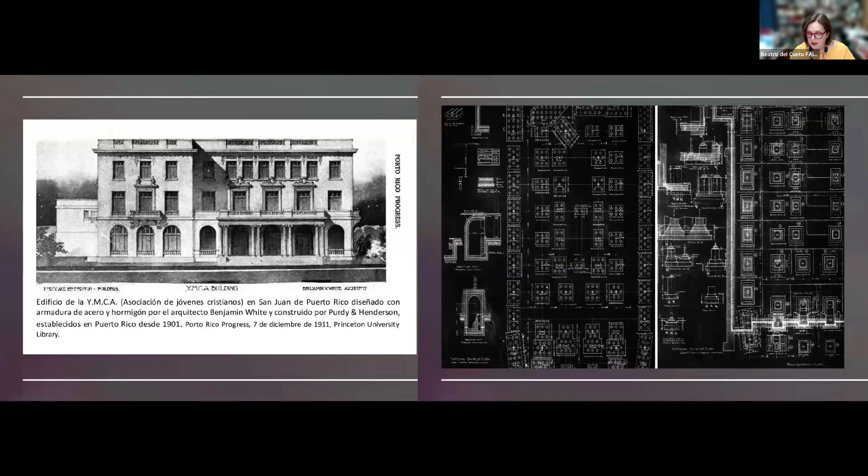This project was approached in a transdisciplinary format from its architectural, social, economic, and heritage history in order to cover all the aspects that affected design and construction. To achieve this, several sources were researched and included, such as national and local archives, national and private libraries, private depositories and collections, online sources, and personally photographing the buildings selected.

Building methodologies evolve. There are several common denominators in the Spanish Caribbean that affected design: our cultural baggage, that is, our historical roots, the island geography, the climate, the types of natural disasters, and the flora and fauna.

The trade routes for the importation of building materials, merchants, and artisans from the old and new worlds made the West Indies or the Caribbean into an important stopover that eventually promoted urban expansions, the manufacture of prefabricated materials, fast and innovative designs, and the use of light steel frames.

The hot and humid tropical climate facilitated the rapid setting of the new material known as plastic stone or cement. The use of standardized molds with a cement mortar allowed prefabrication and facilitated installation.

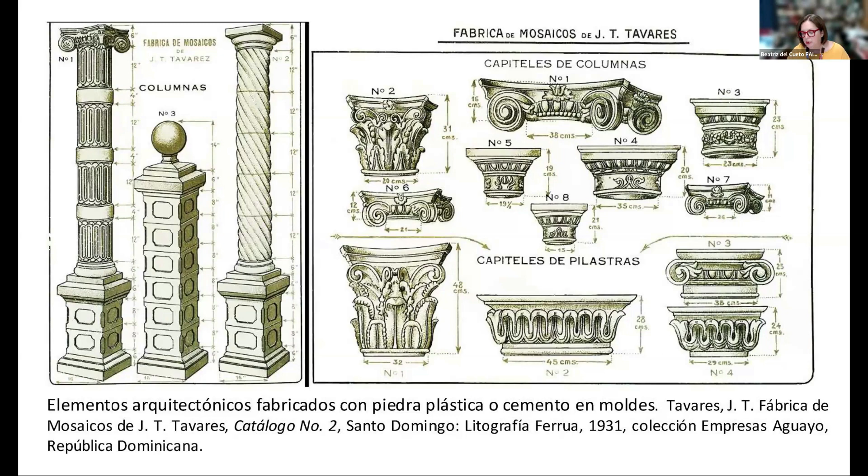Immigrations from Spain and the United States promoted the foundation of the first cement factory in the region near Havana in 1895. After the Spanish-Cuban War of 1898, there was a period of economic growth spurred by sugar sales, which resulted in an increase in construction projects and the subsequent use of cement and its byproducts as a main building material for a region eager to modernize.

The arrival of iron as a result of the Industrial Revolution, which fomented railways and infrastructure worldwide, also revolutionized the sugarcane crushing machinery that accelerated the processing and production of sugarcane in the Caribbean.

This material proved indispensable for international expositions and fairs, like the 1893 Columbian Exposition in Chicago, with lightweight and high-rise structures, plus the need for worldwide infrastructure.

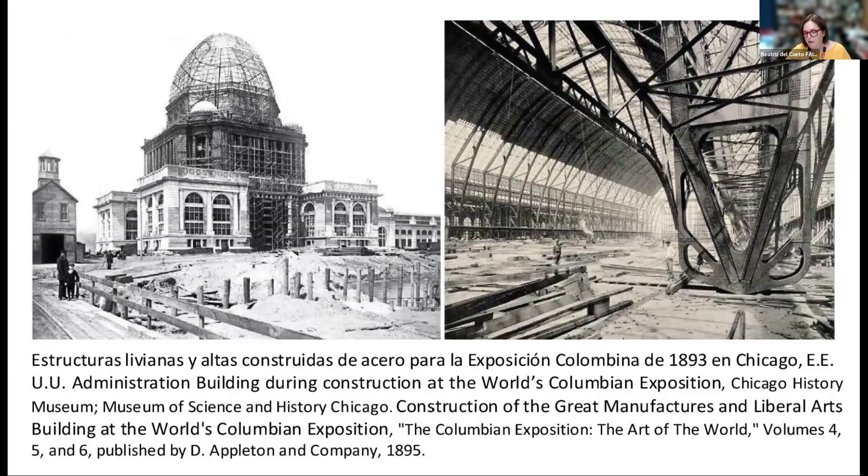Despite the establishment of local cement factories, imports from the United States and Europe continued, announcing it as permanent, waterproof, and fireproof.

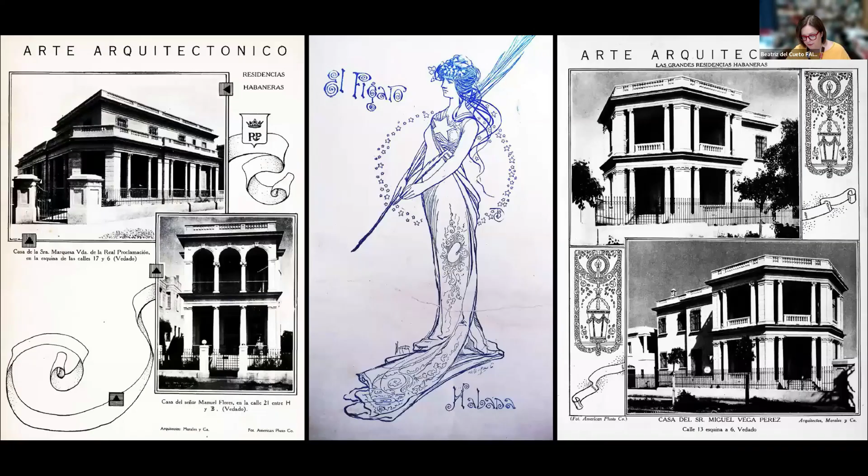Residences began to be built with cement because of its hardness, easy use for island workers, and the protection it provided against natural disasters. It was fast-setting and provided early strength.

At the end of the 19th century, the catalogs of hydraulic cement tiles or mosaics and the tiles themselves arrived in the region together with merchants and artisans versed in their manual manufacture and installation.

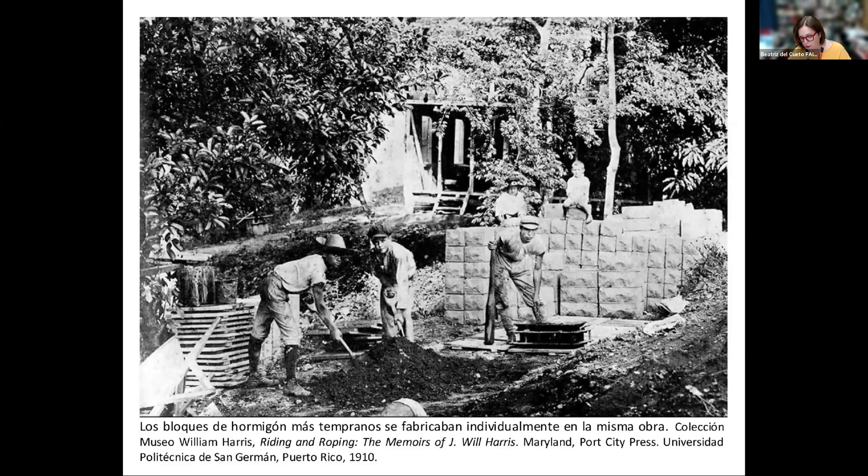Concrete blocks, or true artificial stones, were a purely American product and invention in use since 1901. It was introduced in the Spanish Caribbean region mainly by evangelical missionaries who imported the metal molds to make the blocks and used them for the construction of their temples, schools, and hospitals in the new territories.

The machine with the molds, used to make the units one by one, was simple and did not require previous experience. The blocks were made on site, where they would be manufactured with a fine aggregate or sand from the same project's subsoil and cement, since finished blocks did not travel well over rudimentary roads.

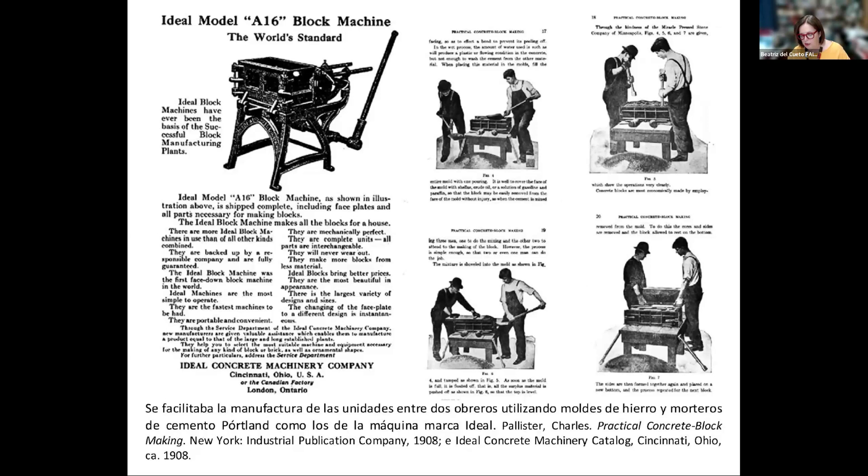Catalogs disseminated artificial stone products or cement blocks. Even though they varied in design, like the mosaic floor tiles, they were the subject of heated discussions and controversy with the purists, since they imitated stonework construction and their appearance was monotonous.

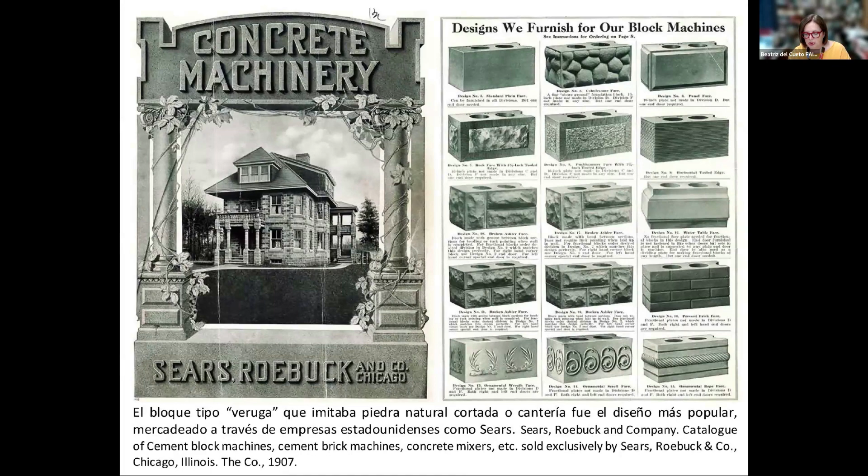The extensive use of iron for railways eventually led to the invention of more durable steel, used to create the framework for buildings that were lighter and more resistant to the ravages of weather. Steel evolved to become an effective building frame due to the speed of its construction and by allowing buildings to be taller and longer. An open structure provided wide spaces with large windows and better illuminated and ventilated interiors. Steel structures in Havana modernized the city's skyline, including the steel frame used to build the Capitol.

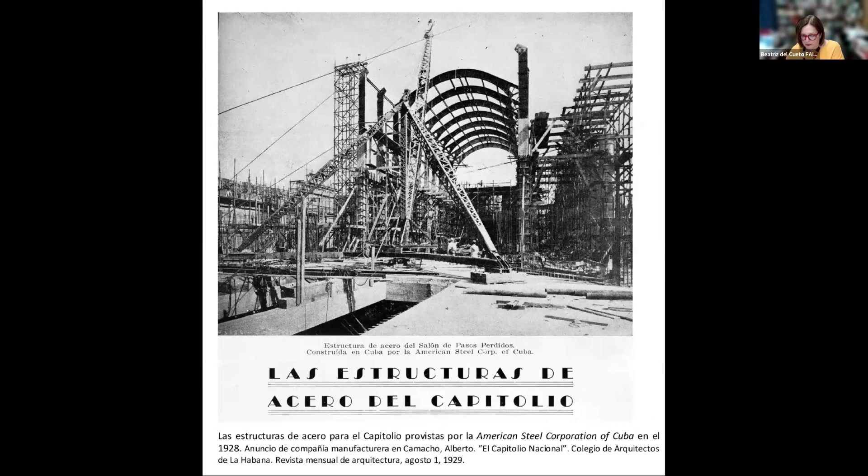Concrete, composed of sand, cement, and medium aggregate mortar, eventually became the most useful material for all types of structures in the region. Local masons, accustomed to using formwork to build rubble masonry and mud walls, found it an easy adaptation using the same form method to build with unreinforced and reinforced concrete. This new material, strengthened with reinforcement bars, was rapidly approved by local building codes for large-scale residential construction. The resistance of these technologies against natural disasters made it the preferred technology throughout the Caribbean.

The new materials provided a radical change in the region. In the three capitals of these island countries, there was a rapid evolution in the use of plastic stone or cement for buildings that were ever taller, more ornate, and more durable.

The Purdy and Henderson Company. The decision to use the Purdy and Henderson Company as the research topic of the modern processes to build was a logical choice, which was facilitated by the quantity, quality, importance, and permanence of the projects achieved by this company in Havana and other cities and towns within the Spanish Caribbean during the first 3 decades of the 20th century.

Engineer Corydon Purdy promoted the structural engineer as an important consultant in the service of architects. He was a pioneer in steel construction in the United States and later abroad, like in Cuba and the Spanish Caribbean. During the 1893 Columbian Exposition in Chicago, he partnered with one of his employees, engineer Lightner Henderson, and so the Purdy and Henderson Company was founded.

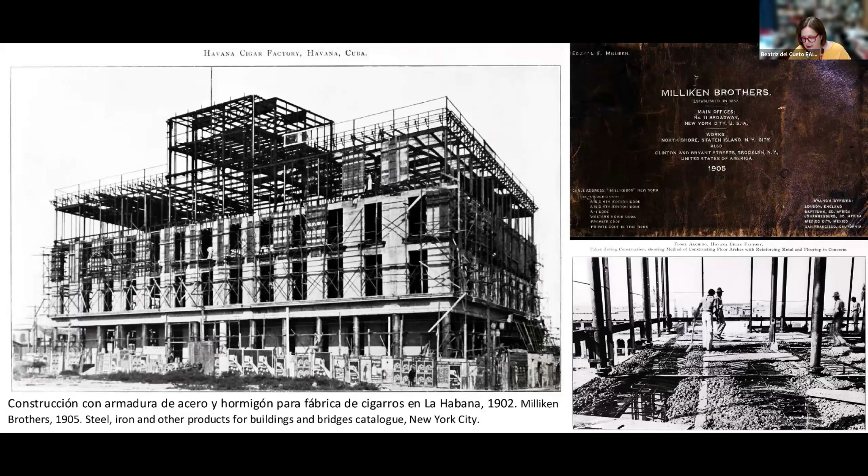The concrete floors for these structures were also illustrated in their international catalogs. Reinforced concrete was used to finish the entire structures for its resistance to hurricanes and earthquakes.

Similarly, the important machines and molds for the manufacture of both the cast stone that would cover these frames and the concrete block allowed the designers to use precast materials that Purdy and Henderson had previously specified and were intimately familiar with.

Purdy and Henderson designed a water-repellent concrete block specifically for its Havana projects where high water tables were a problem. These blocks solved the problem, especially for the first basement built in the capital city to house the National Bank's vault.

These blocks were fireproof as well as waterproof. Molded architecture composed of prefabricated parts was a lucrative business since it was easy and convenient to consult a catalog and choose the desired ornamentation.

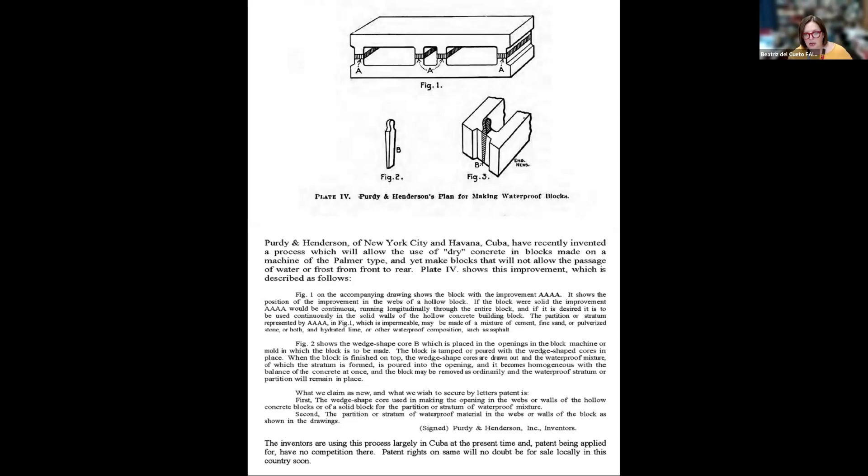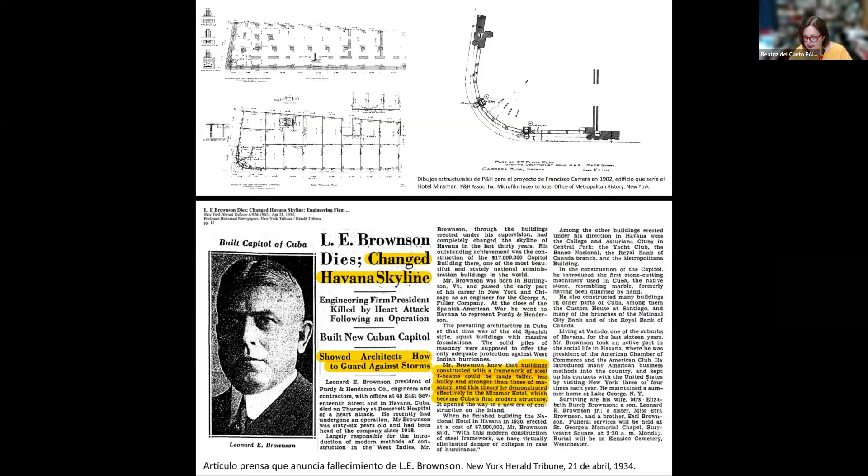El Hotel Miramar was built in 1904, designed by architect José Toraya. It was the first building constructed by P&H in Cuba. It employed modern technology of steel frame covered with cast stone and water repellent blocks. The speed of construction was a notable element and guaranteed stronger buildings against the effects of hurricanes and earthquakes.

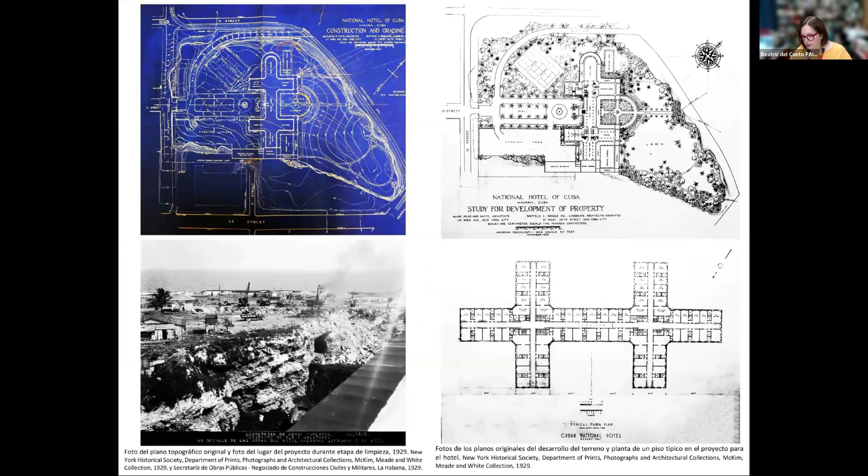The Hotel Nacional was finished in 1930, designed by McKim, Mead and White from New York in another collaboration with Purdy and Henderson. Steel structures were covered with natural stone from Cuban quarries and molded cast stone in the upper parts of the building.

A coup d'etat of the government in 1933 led military personnel to take shelter in this building for its publicized strength and resistance. The hotel has survived in excellent condition due to continued use and continued maintenance.

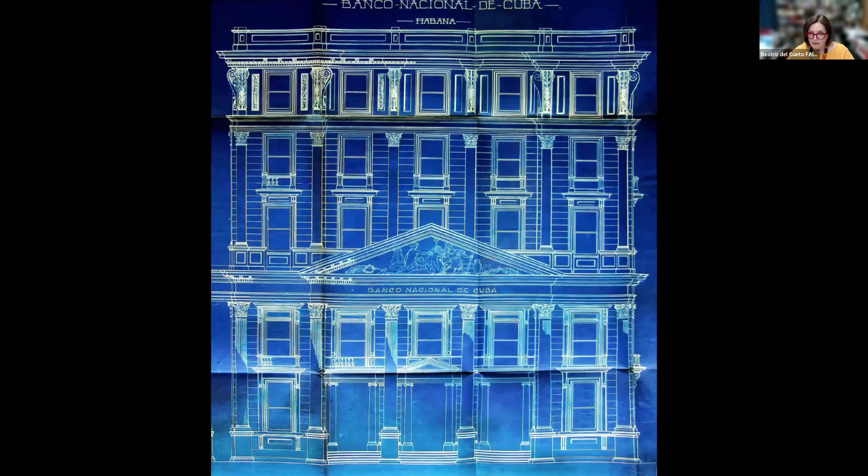The Banco Nacional, or National Bank, was built in 1907. It was designed by architect José Toraya. It was the first building which included technical specifications on the required fireproof quality of a building, including 3 water tanks on the roof in case of fire. Steel reinforcement with 403 columns and 600 wood piles due to high water table was its structural support.

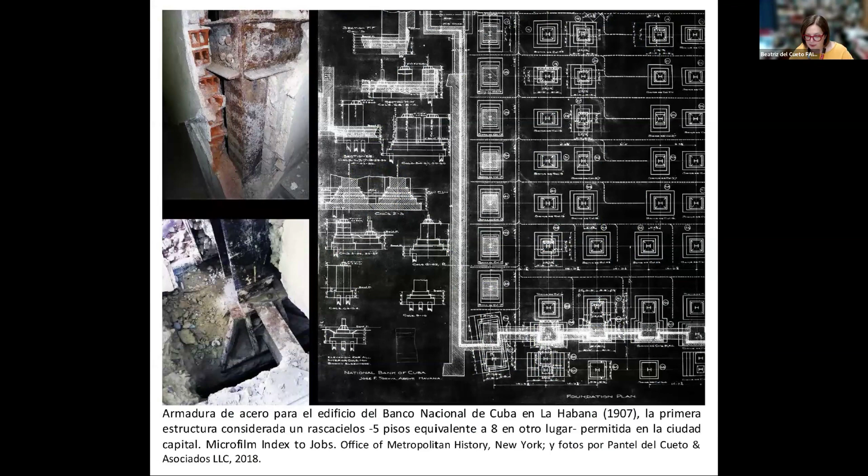Hollow clay tile block was used to cover columns and for interior partitions. It was the first skyscraper in Havana, 5 stories high, equivalent to 8 levels elsewhere. Lush interiors, including 20-foot tall columns supporting a leaded glass barrel vaulted skylight in the main lobby, were its main features and still exist. A special drainage system and use of waterproof block designed by P&H was used to withstand the high water table.

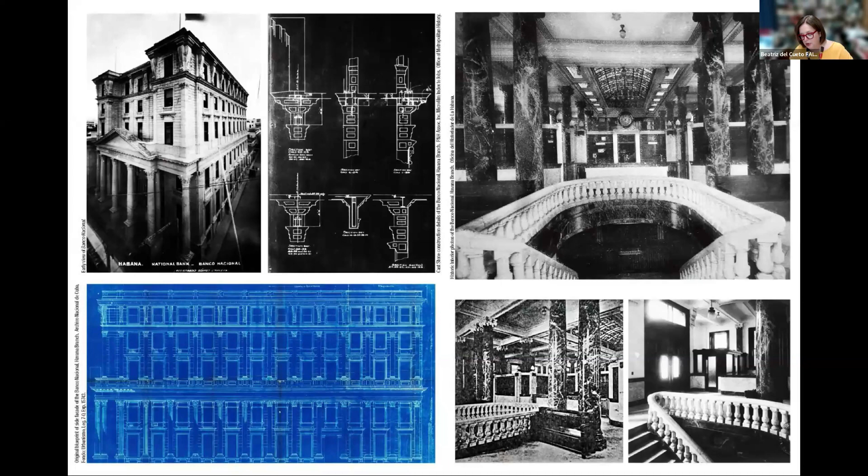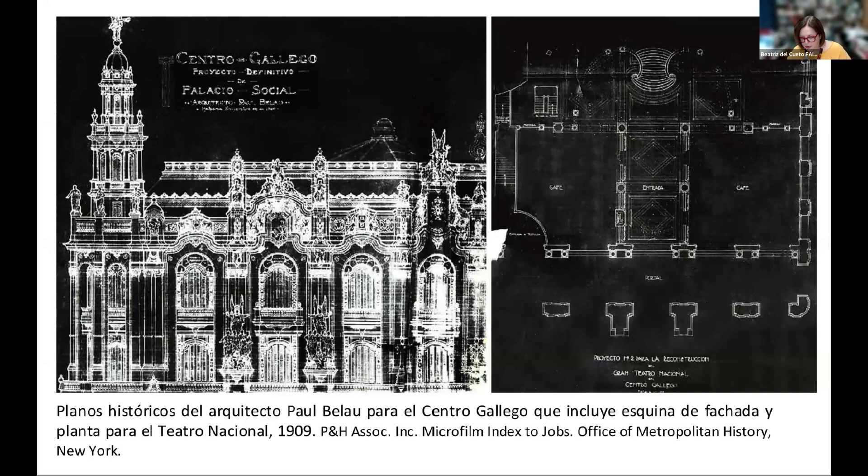It is a superlative example of the encapsulation of an existing historic structure within the urban block where it was to be built. The 1838 Teatro Tacón remained within the premises of the new project, even maintaining its own original facades.

There was an automatic fire suppression system, 1,000 seats, elaborate facades, and skylight. Presently, it's been completely rehabilitated, and the theater is the place for major theatrical performances.

The Residencia Marqués de Avilés of 1916 was designed by American architect Thomas Hastings from the Carrère and Hastings studio in New York.

It's steel with cast stone finishes with facilitated light and strong roofs. For me, it was really surprising to find residences built with steel frame, but it was very commonplace after Purdy and Henderson started doing this, that the work of this type of construction continued.

La Lonja del Comercio, or the Produce Exchange Building of 1909, was designed by Spanish architect Tomás Mur with architect José Toraya. As you can see, Torraya was everywhere at the beginning. It was the second skyscraper in Havana, also built by P&H.

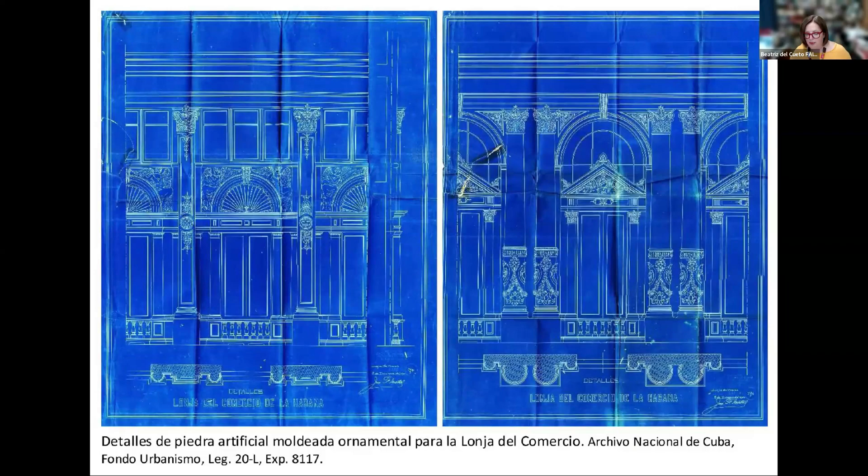Steel with cast stone finishes manufactured in Cuba were its main building material. It was also designed to be fire, earthquake, and hurricane proof. One unusual and very particular material was the floor slab system, which consisted of twisted wires and concrete called the Metropolitan floor, which was fireproofed and recognized as the most resistant, not only for the loads they had to bear, but also for the action against fire.

It has a very prominent use nowadays, including major TV and radio stations.

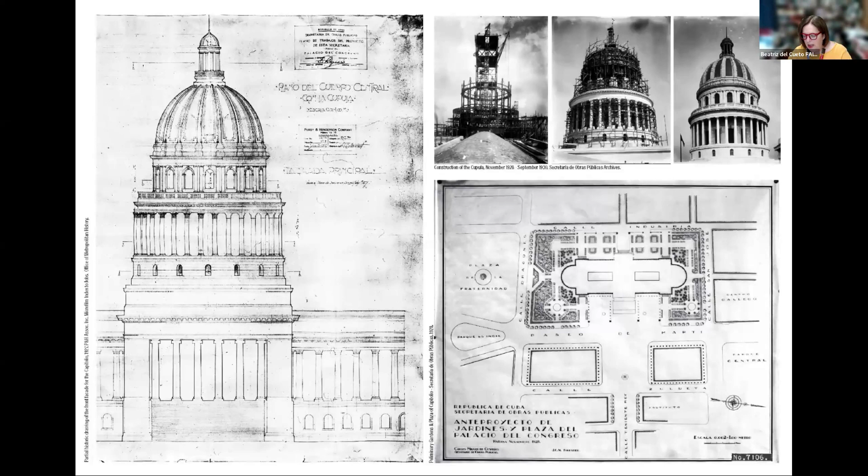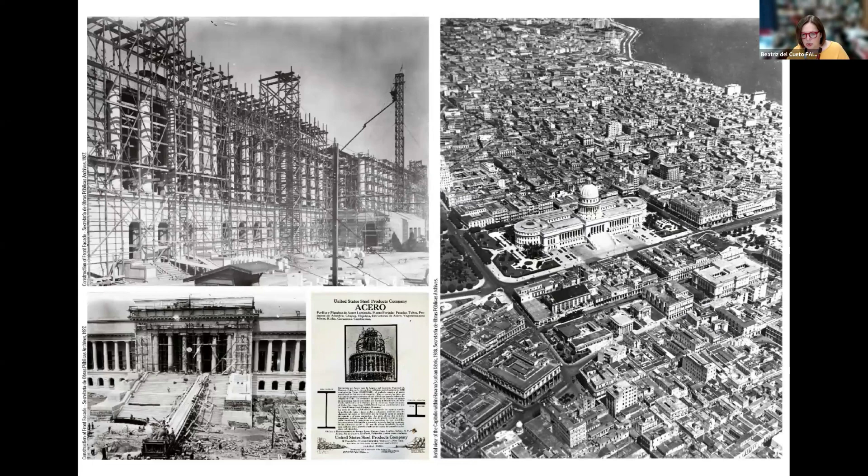El Capitolio was finished in 1929. It was designed by the Govantes and Cabarroca firm with Eugenio Rayneri, with steel frame with natural stone, again being demanded by the Cuban government, and reinforced concrete floor and ceiling slabs. Special equipment had to be imported to Cuba by P&H for the construction and stone cutting of this major structure.

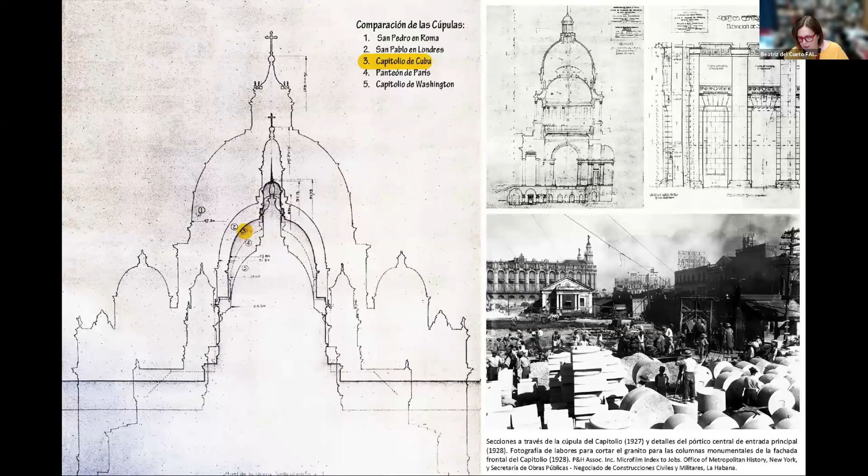P&H joined its design employees with those of the Secretary of Public Works Office to complete the plans as the fast-track project progressed. There were 1,000 day workers and 400 night workers, which completed the largest building in Havana in a period of 3 years and 50 days.

Recently completed was its complete restoration, and I'm happy to say it's being used again.

The grand staircase for the University of Havana was completed in 1927, a project by Cesar Guerra. It was built through a presidential decree as a fast-track project to be completed by P&H, who were then building the Capitolio as well. The grand staircase was built of reinforced concrete paved with marble. As you can see, it still remains and it's still a very emblematic feature within Havana's cityscape.

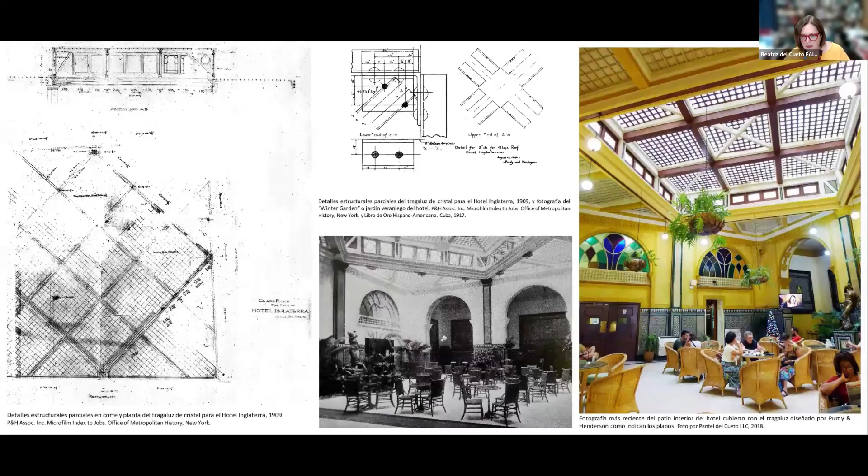There were also additions and remodeling projects. This is the Hotel Inglaterra, for which they covered the interior patio to make it into a skylight, as early as 1909.

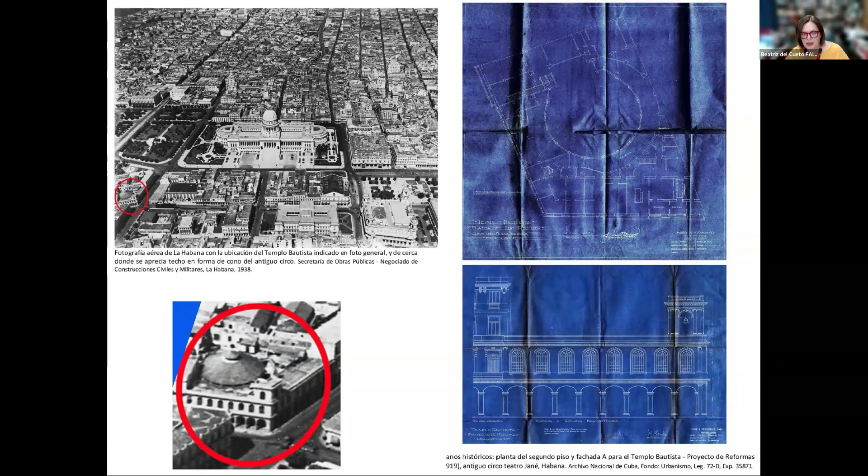El Calvario Baptist Church of 1921, following the example of the Centro Gallego, the old Jané Circus Theater from 1899 was encapsulated within the new church. This is the reason for the horseshoe-shaped plan, ceiling height, and elaborate iron structure that was visible and exposed from its inauguration, a first in Cuba.

Between the 1930s and the 1950s, there was a major disruption. By then, Purdy and Henderson had just 2 branches left, in Havana and in New York. According to documents found in Havana, there were few projects during this period, possibly due to the New York stock market crash, the Second World War, and the political instability of Cuba. Regardless, 2 important buildings were constructed during this time, amongst others.

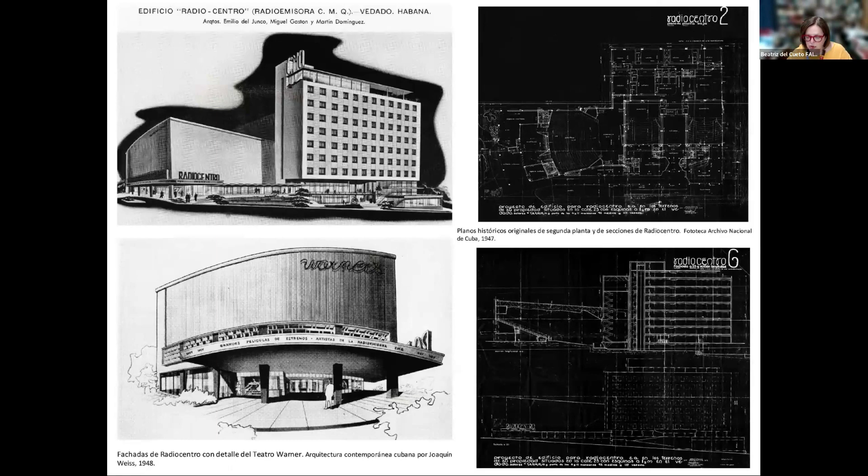This is the Radio Centro building, designed by Emilio del Junco, Miguel Gaston, and Martín Domínguez Associates, which was the first multifunctional building in Cuba. It was built with a steel frame, reinforced concrete, hollow clay ceramic tile, and brick. The theater structure is 4 stories high, with a capacity for 1,600 seats and a 5-story tower for offices. It was the first air-conditioned building in Havana.

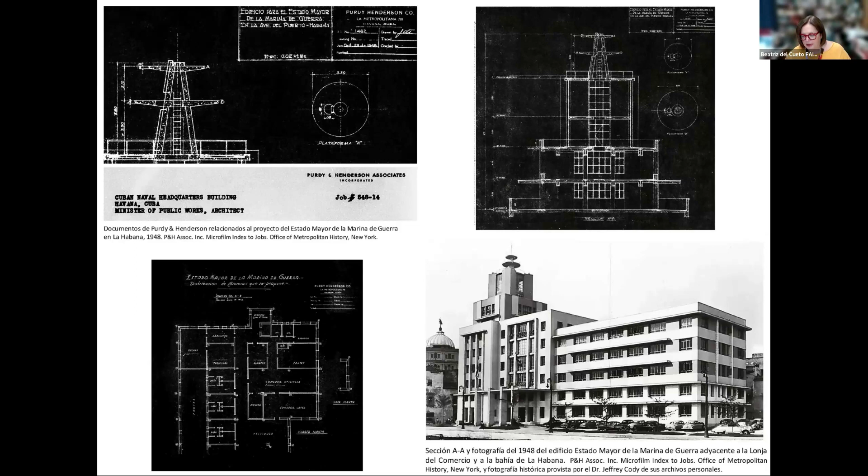Restoration and rehabilitation, although this is my specialty within the architectural profession, research could not provide much data because the entrance to all buildings being remodeled in Cuba was and is still prohibited, nor was it possible to obtain detailed information about the ongoing process.

The Banco Nacional was the only building sampled through an alliance with the Cuban Structural Analysis working on the project. Scientific analysis of the finishes of the plastered columns in the main lobby found false marble scagliola decoration.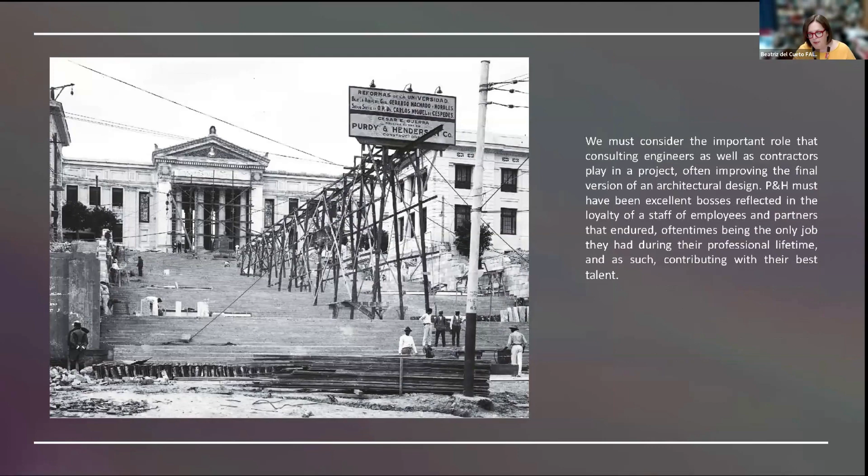The most impressive results of this research have been the realization of how both good design and excellent construction methods can even survive the worst neglect. As a company, Purdy and Henderson established new means, methods, and materials for building, and to them, their employees and partners, we owe our gratitude. If architecture is built poetry, Purdy and Henderson left us volumes of worthy examples.